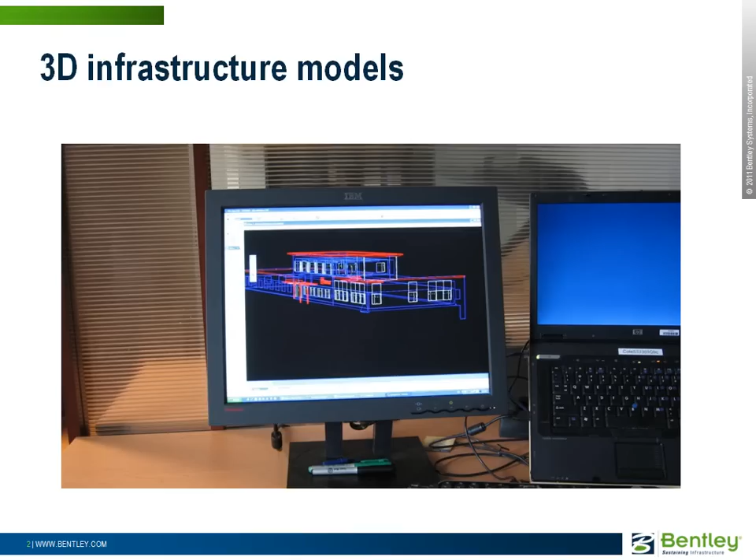Engineers and architects design infrastructures using models. Models are typically displayed and edited on a desktop computer. They are virtual and generally viewed outside of the real-world context.

To help visualize an infrastructure model in its real-world context, for instance before it is built, models are sometimes rendered in a more real context by adding textures, lighting, a backdrop image, or natural objects like trees. These techniques take objects from the real world into the computer.

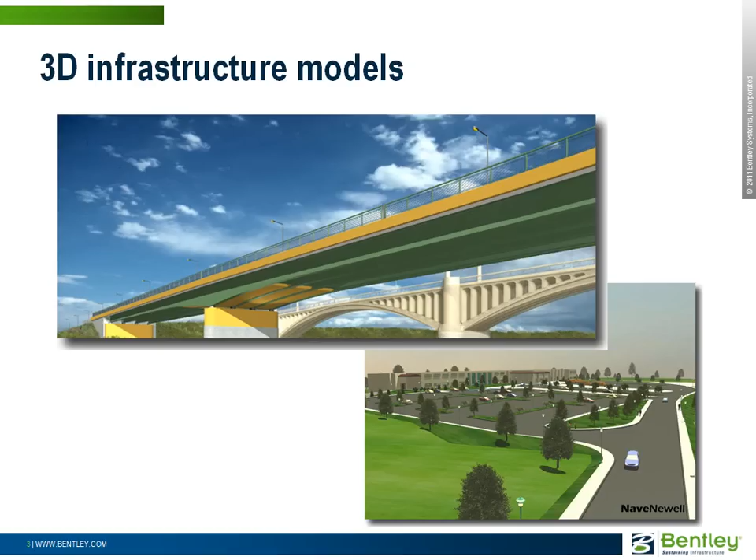One day we asked, what about doing the opposite? That is, taking the 3D model out of the computer and displaying it in the real world. Well, that's augmented reality. We started being interested in augmented reality 5 years ago, and we think it has a lot of potential in the infrastructure world.

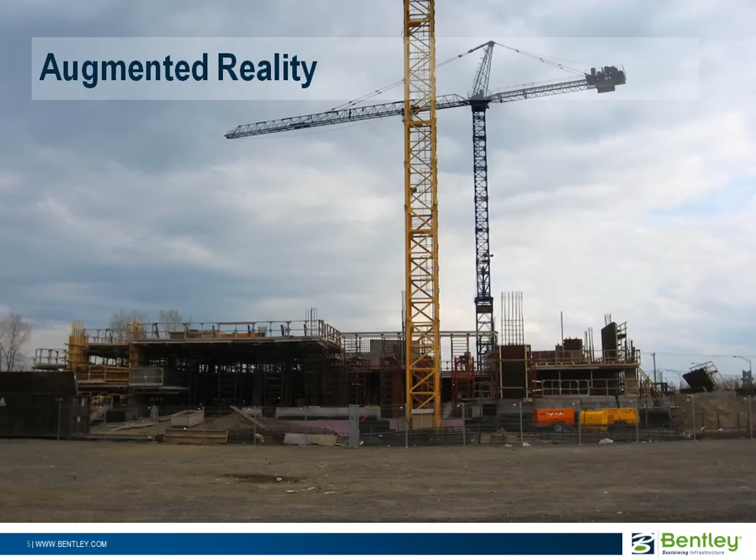Here are a few examples. Let's say you have to periodically visit a building site. You want to check that the work progresses at the required speed and that it is done according to specifications. You can take your drawings and compare their 2D contents with the building you're seeing.

But checking whether there is a difference between the drawing and the actual building is, as such, a difficult task that requires attention to details. You have to guess what part of the drawing you're looking at on the actual building, abstract the fact that the building is not complete yet, and extrapolate the third dimension from the drawing, etc.

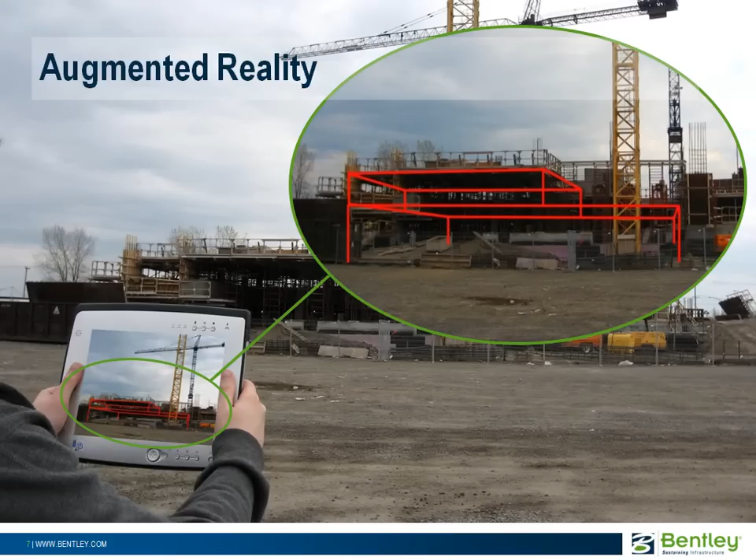And if you want to make sure everything is at the right place, you will have to take actual measurements. The comparison would be much easier if you could actually superpose the model to reality.

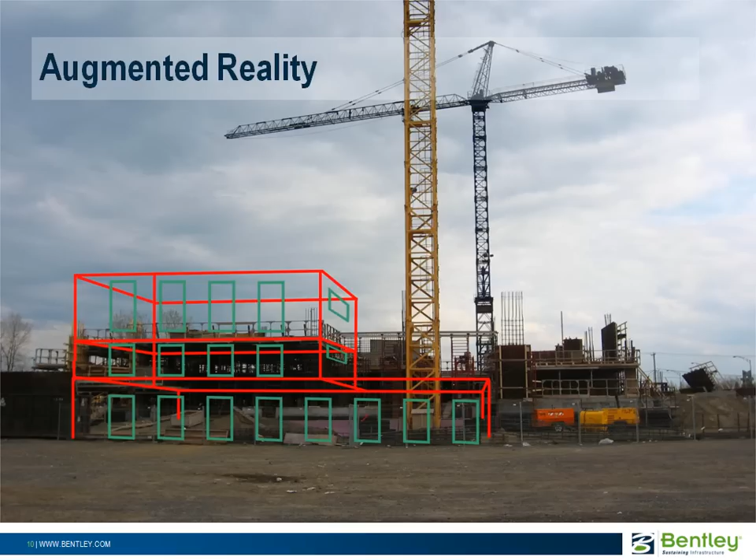You could then display a wireframe version of the model for basic comparison, add more layers, see the model at a later completion date, and if your view of the site is not clear, you could also move around the building. The superposition of the model to reality could make your task easier.

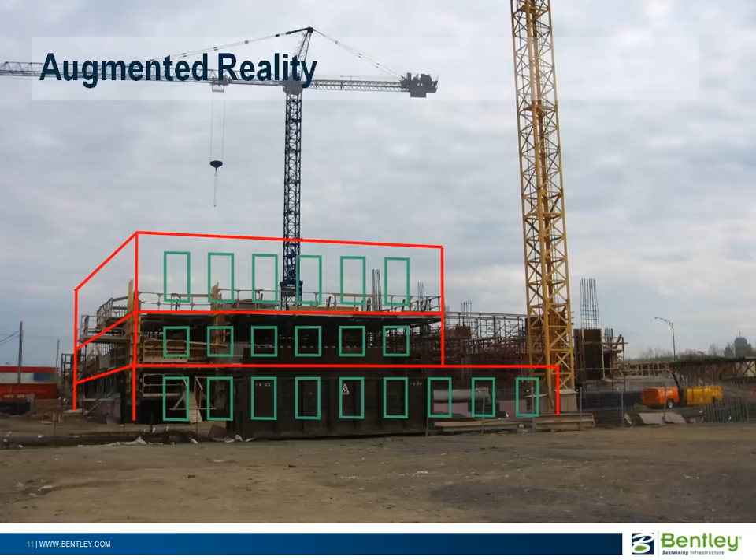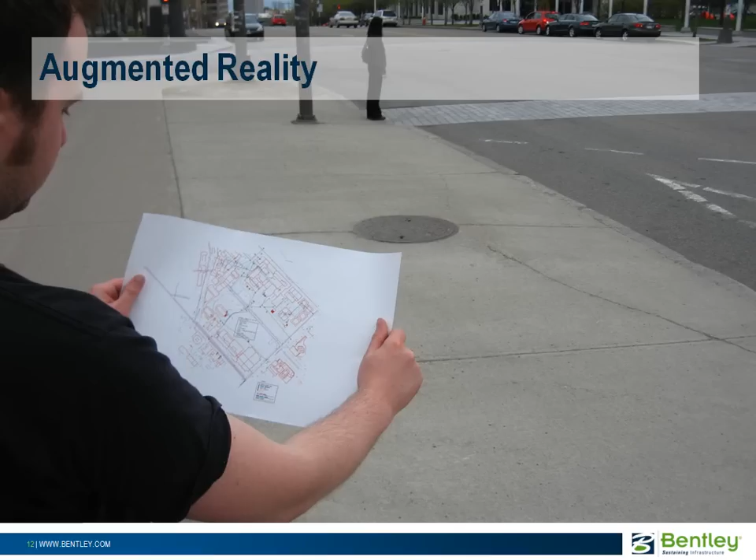Let's say now you are interested in the underground piping network. You want to find the right manhole in order to check a specific pipe connection. For that, you can check your drawings, try to locate your own position within the drawing, and eventually find the connection you're looking for. That will tell you which manhole will give you access.

An augmented reality system could let you find your pipe connection more quickly. The user would simply hold a tablet in his hands, and the device would display the network of pipes with interconnections to drains and manholes by superposing the pipe model to its view of reality. To the user, it would then become clear what is the connection between manholes.

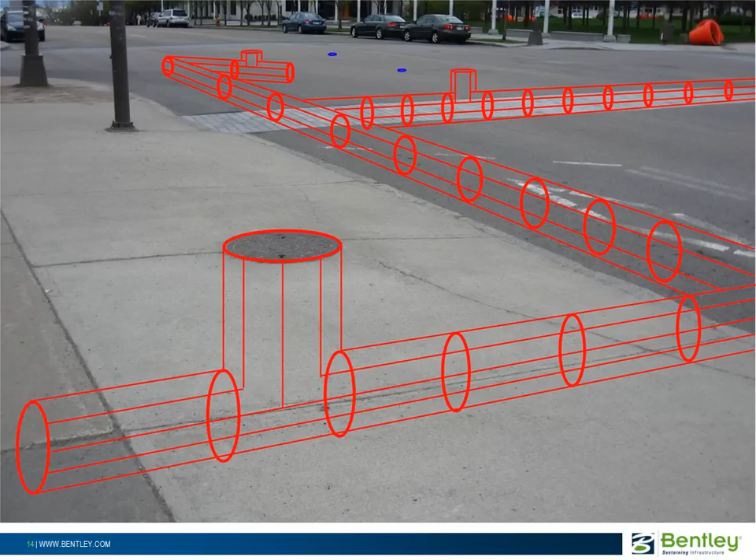But in addition, the system could also display attributes on each element and show the way to the pipe connection that the user is looking for.

Now, if you are a database user, you could also see references to your georeferenced documents in the real world.

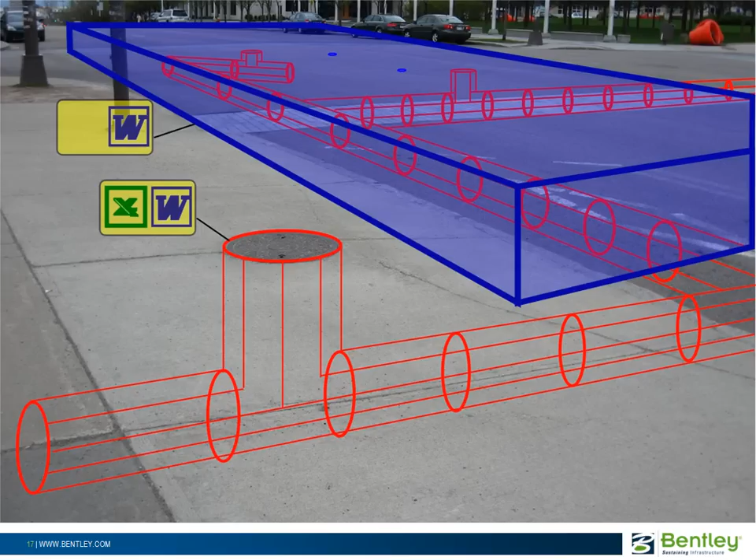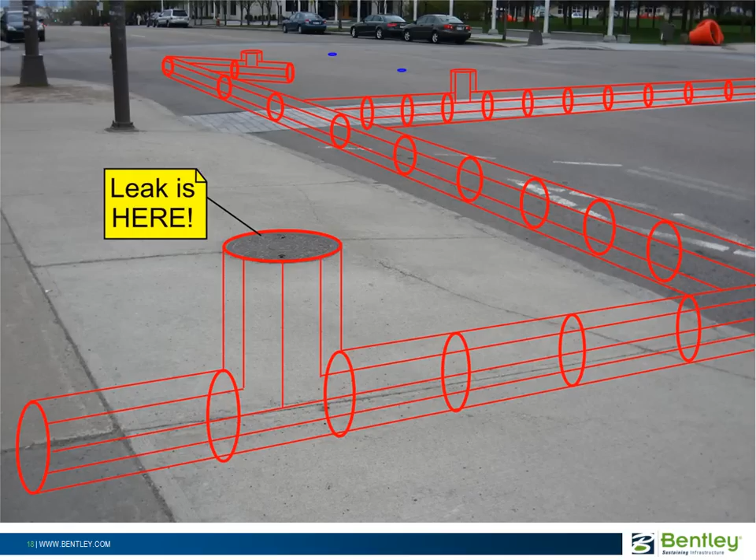Finally, if you see something that should be fixed, you could put a sticky note with some explanation. The virtual note would be attached to the corresponding object in reality and could be seen later by a maintenance team who would also be using an augmented reality system.

Or get information about a specific street drain by aiming at it with a crosshair and simply clicking on it.

Similarly, users could view the IDs of real objects displayed in the real world.

Augmented reality has a lot of potential in the infrastructure world. However, it is hard to achieve. Well, I will rephrase that. It is easy to achieve if you are ready to accept huge compromises. However, if you want high quality, engineering quality augmented reality, the task is a real challenge.

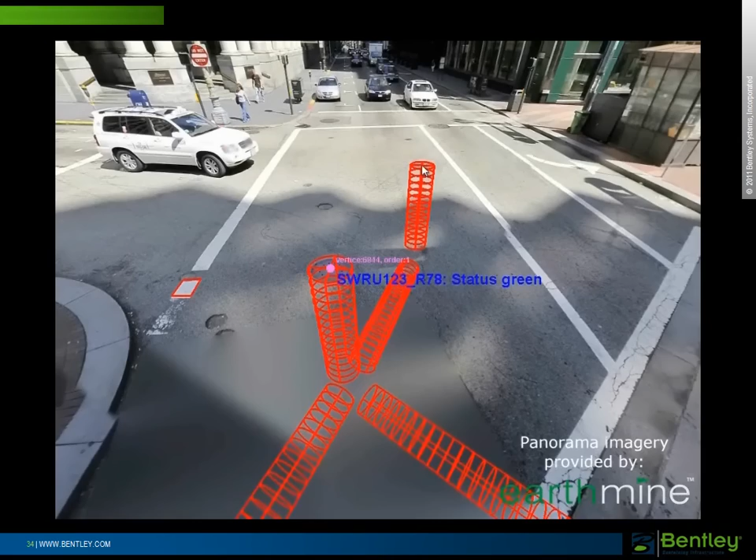But what we really wanted was a tool for the mobile user. Let's say the user is on site, and he wants to augment the scene. We use the tablet's GPS to get its current location. The mobile device then broadcasts that current location to the panorama server. In return, the server sends the panorama that is closest to the current user location. Finally, the application tracks the instantaneous tablet orientation using its orientation sensor and displays the portion of the panorama that corresponds with that orientation.

So what is displayed on screen is not reality, it is a panorama. But that panorama is displayed in the same orientation as the tablet, providing an illusion of augmented reality. So what we end up with is not an augmented reality application, but it is a very good approximation that has the advantage of offering an accurate and jitter-free augmentation.

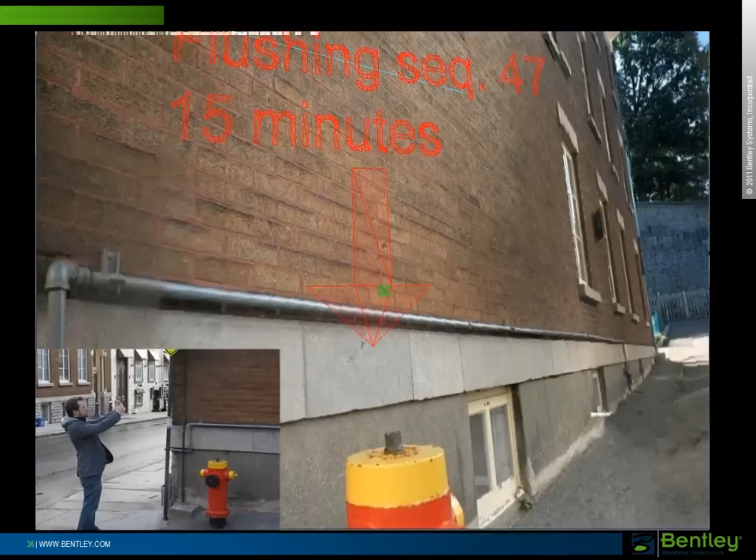So here is a video of our mobile version. The user walks with his tablet on site with a preloaded panorama. As the user moves the crosshair on the buildings, a 3D model appears that provides attributes to those elements. As the user turns around, the device displays the portion of the panorama that corresponds to his instantaneous orientation, letting the user augment other areas of his surrounding. He can view bridges before they're built, or view information about flushing sequences for hydrants. Basically, a system that lets you click on real-world objects to get information about them.

Last summer, we pursued our exploration of panoramic image augmentation by studying another difficult problem: spatial perception. Augmented scenes often look supernatural. Adding 3D models to a real scene is unusual and sometimes confuses the brain, which refuses to understand what it sees. That is illustrated here, where a 3D pipe model is used to augment a street scene.

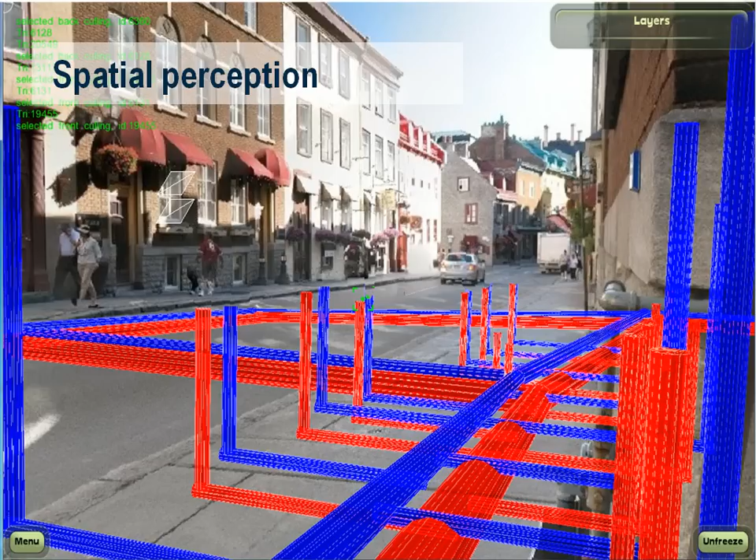The photo is meant to show underground pipes through the ground. The augmentation is achieved by displaying the pipes on top of the image. If you had X-ray vision, that is possibly how you could see the pipes. The problem is that underground pipes are located under the road surface, so you're not supposed to be able to see them. Displaying the pipe this way creates a confusing image that is hard to understand for the brain. Such an image does not convey good spatial perception. It is too confusing to be useful.

In our earlier prototype, we had also tried representing pipes with a wireframe structure, with perspective. Spatial perception is a bit better in this case, but the pipes still look as if they were on top of the road surface, not in the ground. The problem is that pipes are normally in the ground, so they should not be visible. If we want to augment a scene with hidden pipes, we have to find a way to make it clear in the augmentation that the pipes are actually in the ground.

For that, we need an analogy with the real world. How do we normally see subsurface utilities? Well, we can only see them during installation or after excavation, and in both situations, we see them inside a hole. We are used to seeing that image. The brain is used to it and understands it. So let's do the same and display the pipe models inside a virtual excavation.

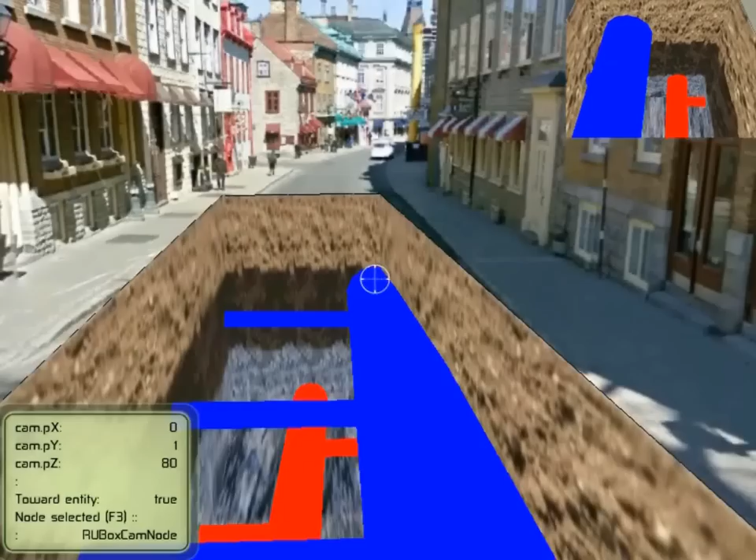And we can move that virtual excavation anywhere on the ground. Now we can also make that virtual excavation larger to let the user see more of those underground pipes and to get a good idea of what to expect for an excavation.

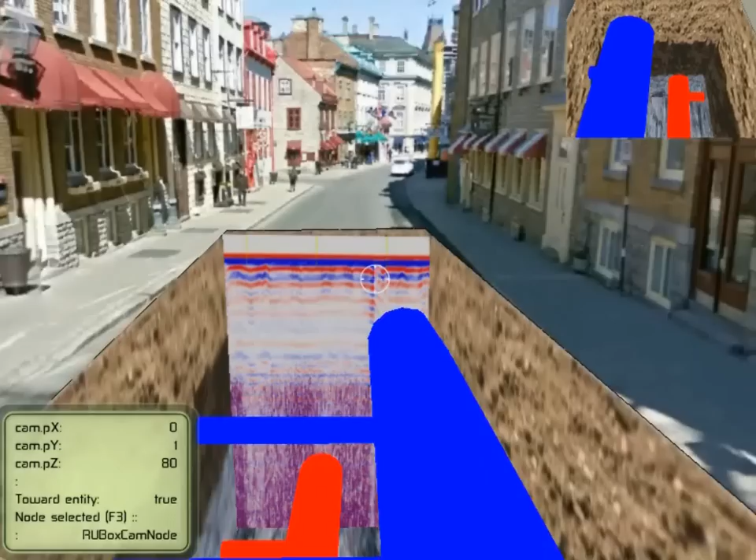Now we've also added the capacity for the system to display ground-penetrating radar scans. And when viewed in the context of a virtual excavation, the GPR scan is more easy to interpret, as we can more easily see whether the pipes in the 3D model were actually detected. That interpretation is possible because all those, that is, the GPR scan, the 3D model, and the surrounding buildings, are displayed together in the same context.

In summary, we have developed 3 prototypes for panorama augmentation. One runs on a desktop and is aimed at seeing infrastructure in its real-world context from a remote location. It could be used, for instance, for preparing visits to the site from the comfort of your office. The second runs on a tablet and is aimed at being used on site for displaying information about real-world objects just by clicking on them. The last one is aimed at showing underground infrastructure in the real-world setting, that is, on the ground.

Augmenting panoramas instead of reality has major advantages. It offers accurate augmentation because the user's location is calculated once and never changes. And the augmentation is also jitter-free because the user does not view reality but instead a panorama, and the model is anchored to it. Also, it lets the user augment reality from a remote location, which could be useful for areas that are not easy to access.